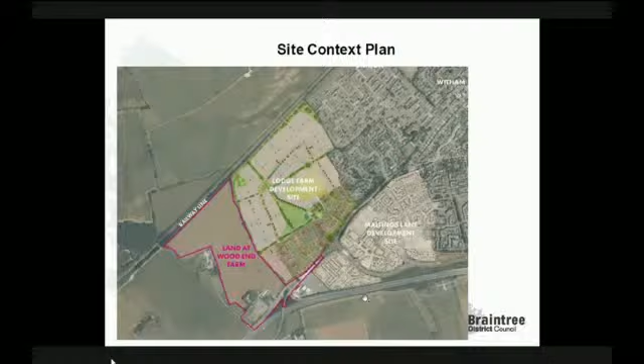In the wider context, further to the southwest lies open countryside in agricultural use that serves to separate Witham from the neighbouring village of Hatfield Peverel, which lies approximately 1 kilometre away from the site boundary. Witham Town Centre is located approximately 2 kilometres to the northeast of the site and provides a wide range of shops, services and facilities, as well as having a mainline railway station. Hatfield Peverel Station is located approximately 2 kilometres to the south on the same line as Witham.

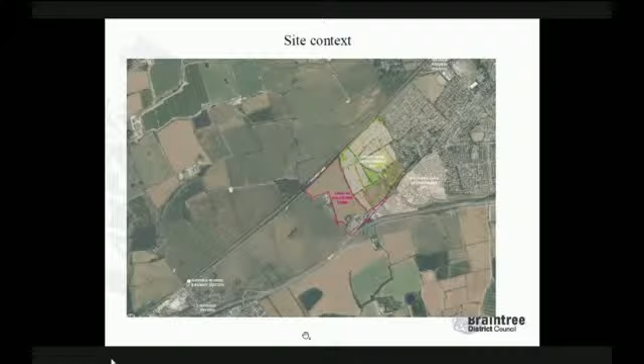The site comprises a single field with a peripheral field boundary marked predominantly by hedgerows and in place hedgerow trees. The southern section of the site is occupied by commercial premises, primarily a car dealership, which comprises a range of buildings, areas of hard standing and circulation space, accessed off Hatfield Road. Immediately adjoining the application site on its southwest boundary is Wood End Farm itself, and an additional residential property known as Mayfield Cottage. There is also the King Centre, a place of worship, and a converted office barn, both of which are currently accessed from a private drive that leads from Hatfield Road close to the junction with the A12.

In terms of the policy context, the site has been allocated as a strategic growth location under Draft Local Plan Policy LPP 23 of the Section 2 Plan, a factor which must be given significant weight in the planning balance assessment for this proposal.

The policy proposes up to 450 new homes, affordable housing, formal and informal open space, play space and allotments, including an appropriate countryside edge to the development and buffering to the railway line to the north. A new 30-place standalone early years and childcare facility, financial contributions to primary education provision, and contributions to other community facilities, including health.

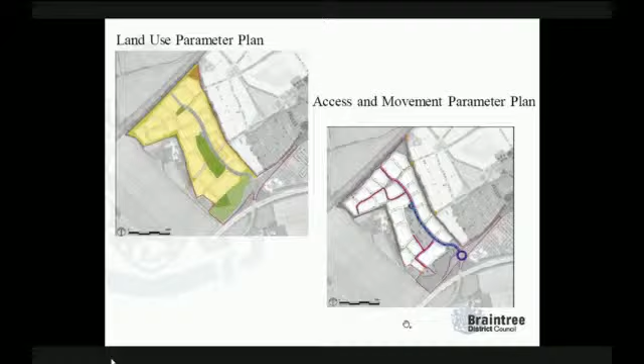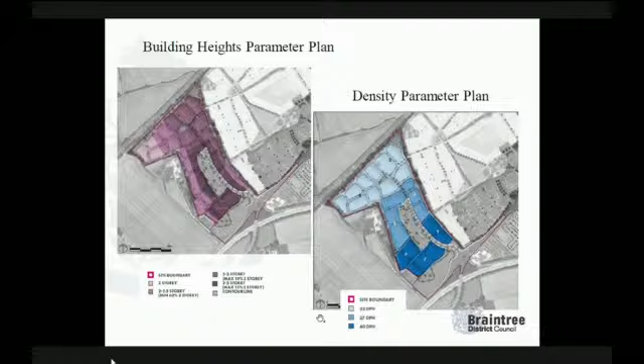The roundabout would create a new arm into the proposed development, with one lane in and one lane out, with a new pedestrian crossing point in the middle. A new arm to the A12 slip eastbound towards Ipswich would be created, with 2 lanes either way.

A new arm would be created westbound towards London to take traffic along, replacing the existing configuration. A new arm would be created to take traffic along Hatfield Road, providing 2 lanes Witham-bound with a dedicated right turn into the petrol garage. In the opposite direction, 1 lane would be provided before splitting into 2 lanes on the approach to the roundabout.

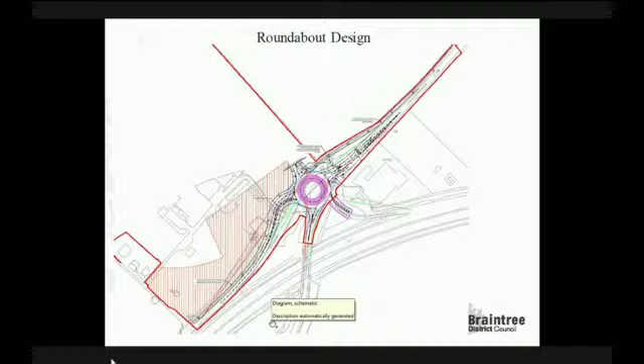In terms of the National Highways safeguarded land, National Highways have actually submitted a supplementary consultation that came out today with new plans, and they are currently designing a scheme to improve Junction 21 of the A12 as part of the government's road investment strategy.

Part of these proposals include the provision of a new Junction 21 between Hatfield Peverel and Witham. The new junction is proposed to fall to the south of the existing Wood End Farm development, where approximately 1 hectare of land has been safeguarded to accommodate these works.

These works include new pedestrian and cycle links, indicated in green, to Hatfield Peverel and to Witham, which will join up to the southern end of the Wood End Farm site.

Whilst the detailed design of the Junction 21 works have not yet been approved, the further consultation will lead to an application to be submitted. The estimation is in January 2022.

National Highways have confirmed that the new proposed roundabout and access arrangement into the site will not prejudice the junction works coming forward.

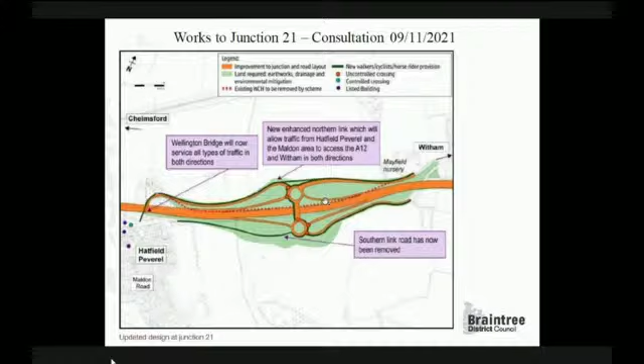As stated previously, the application includes a design code which officers have been working with Countryside on. The design code is considered to be of high quality and forms the basis of what future developers of parcels of land on the site must adhere to. It complies with the Essex Design Guide and Essex Parking Standards.

The site has 3 different character areas: the gateway to the south of the site, the greens to the centre of the site, and the lanes to the north of the site.

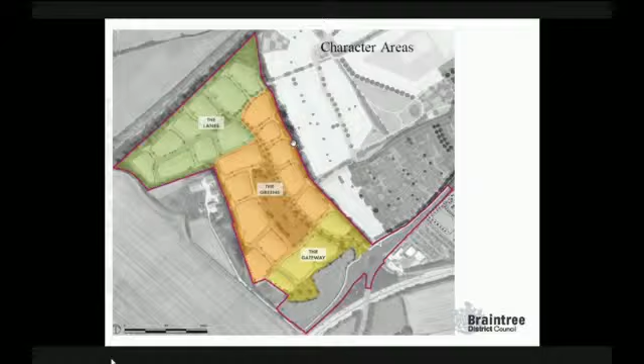The gateway provides the formal entrance into the site and also contains the highest built density within the development. It is important that it provides a striking gateway into the site and that it sets up the overarching character for the rest of the scheme, both in terms of landscape and built form.

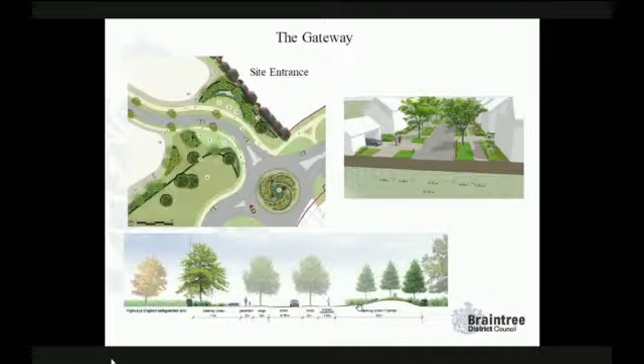This character area will include a greater variety of materials to add character to the slightly higher density development. Some uniform use of materials is appropriate in the central parts of the individual street scene to ensure logical use of materials and reflect streets and building status.

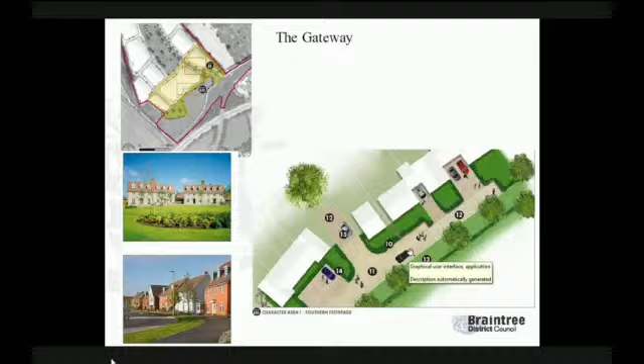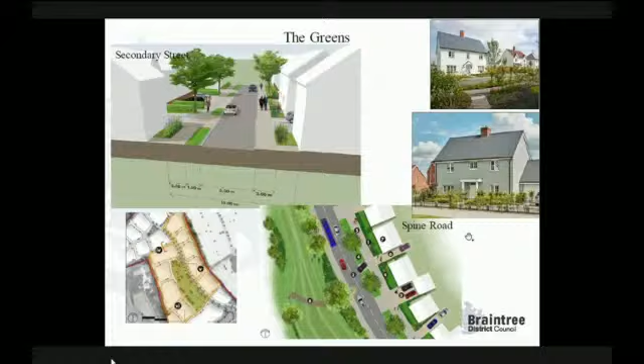The greens occupies the central portion of the site and provides frontage onto the main open space and Spine Road. It is mainly of medium build density and also includes the interface between Lodge Farm development to the east and the existing Wood End Farm complex to the west. A light green weatherboarding is introduced for predominant use in this character area, reflecting the large area of open space, as well as beige buff bricks and some limited use of yellow and green render.

This character area also occupies the central park space. The park space comprises predominantly grassland and a play area, overlooked by dwellings on all sides. This open space will be informal and open in design for flexibility for a range of uses, but framed by a line of trees to define its eastern edge in relationship with the Spine Road. The central park will include active space for kickabouts, a local play space area, informal play with stepping stones.

The central open space is segregated into active, passive and flexible space, as seen in the top right hand corner of the screen. The park's design has been incorporated to take all age groups into consideration by providing informal shady areas to sit and have picnics, active areas for football and a formal play area.

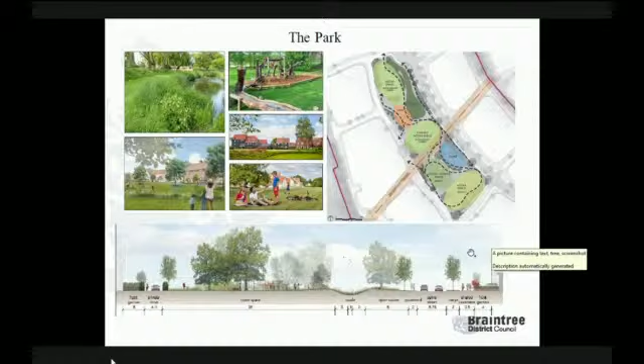The park also accommodates a series of infiltration basins and a swale contributing to the drainage network. These gentle depressions in the ground will be dry for the majority of the time and can be used for recreation, only becoming wet in high rainfall events.

There have been lengthy discussions with ECC SUDS, the developer and officers with regards to the SUDS on the site in terms of usability, design and specifications. The drainage strategy is made up of a combination of underground crates in the middle there, a swale that runs

from north to south, a forebay, which is this pond area here, and 2 infiltration basins, located within the southern area of the park. This combination has been devised in order to maximise the efficiency and effectiveness of the SUDS options, whilst also maximising the usable open space within the park.

The ground investigations identified the southern end of the park as the optimum area for infiltration, and the master plan has been shaped around providing infiltration in this area.

For the majority of the time, the infiltration basins will be dry and can be used for recreation. However, at times of heavy rainfall, Basin 1 will fill with water, with Basin 2 immediately next to it providing an overflow area for extremely high rainfall events, maybe a 1 in 30 storm event, so that Basin 2 will remain dry predominantly all the time.

A raised weir, should Basin 1 be full, is provided, where you can see number 3 on the screen. A pre-treatment forebay is included for pollution treatment, which has a pond dipping platform.

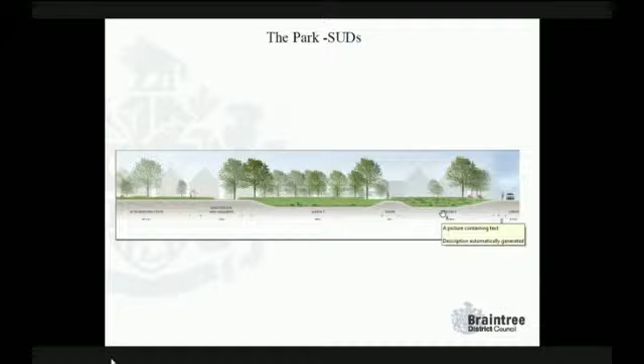In terms of the final character area to the north, the lanes, this part of the site forms the rural interface between the development and the open countryside to the northwest. It comprises the lowest built density and is looser in character, containing a smaller village green, grass verges and the site's allotments, as well as the northern green corridor. Pale blue and off-white render is incorporated for use in this character area, combined with greater proliferation of darker weatherboarding, which will reflect the rural character of this type of development.

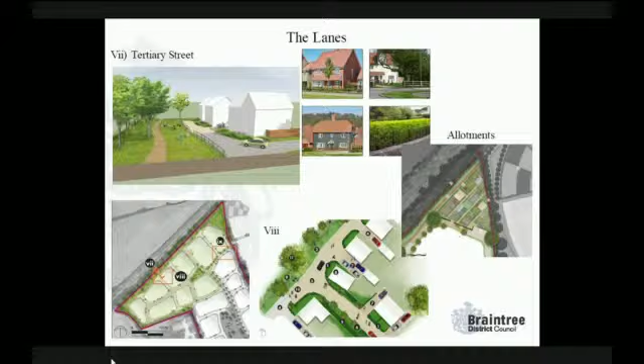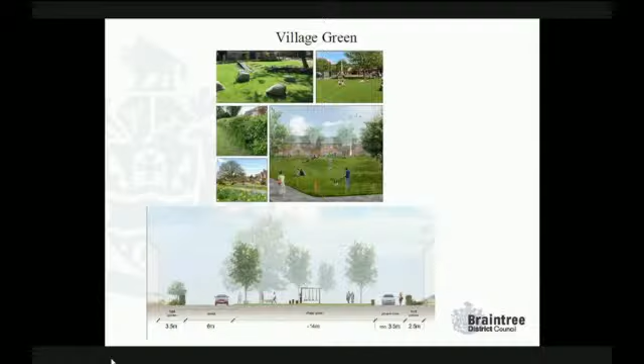A smaller village green is located in the northern area here, which provides opportunity for informal play and a lap for children. Like the main park, its boundaries are generally open, with tree planting providing shade. It's overlooked on all sides by dwellings and accessed by pedestrian footpath links connecting with the wider network of open space and green corridors.

The site incorporates wide green buffers around the periphery made up of existing and proposed vegetation. An 8 to 10 metre buffer will be provided on the western and eastern boundaries, containing buffer planting and informal footpath. Existing boundary hedgerows will be supplemented with native shrub planting, as well as a grass planting strip to separate the boundary planting from the streets and built form of the development.

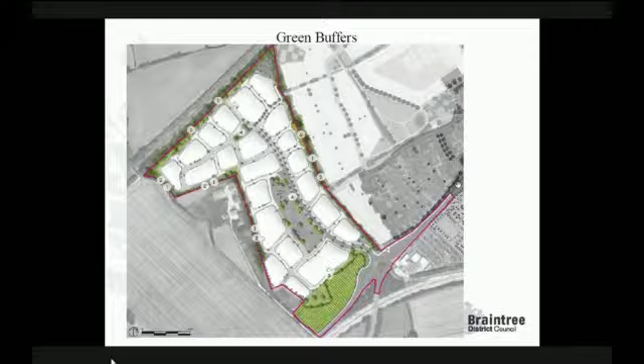The northern boundary buffer, adjacent to the railway line, is consistent with that approved at Lodge Farm adjacent. Within this space, areas of open space are provided, which includes a meandering foot and cycle path linking to Lodge Farm, potentially at its eastern end, and varying widths of amenity green space, consisting of a combination of grassland, planting and trees. The width of this buffer will range from 10 metres towards the eastern end to 23 metres in width from existing vegetation to building edge.

Although very little wildlife interest was recorded on the site requiring mitigation, biodiversity enhancement principles were designed into the scheme at the earliest stages, aiming for a net gain in biodiversity across the site. Replacing areas of commercial land and intensely managed arable farmland, this scheme has incorporated green buffer strips around the site to aid and encourage wildlife movement, supplemented by green corridors through the site in the form of verges and treed boulevards. These provide broad strips of landscaping and buffer planting and allow for quiet enjoyment. The northern boundary, in particular, has been broadened to assist use of this land by animals such as reptiles, which were found to move between the railway line and the small strip of grassland that existed in the area.

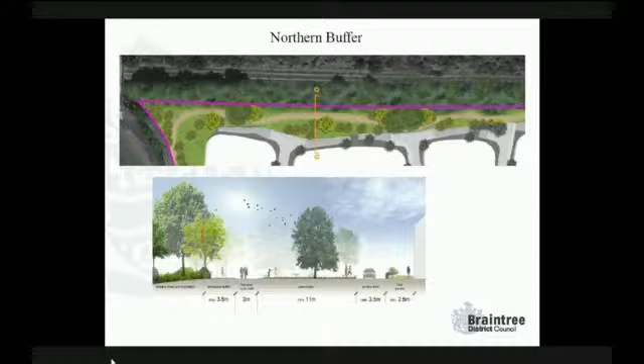In terms of the National Highways safeguarded land, it's important that there's an interim design which provides a positive interface between the residential parcel and the safeguarded land, and which ties in with the design intent of the scheme as a whole. The detailed design of this layout will be pursuant to requirements of the Section 106 agreement, but it is envisaged that hedgerow and grassland paddock is proposed, with the southern edge and boundary with the A12 slip road defined by a simple timber post and fence rail.

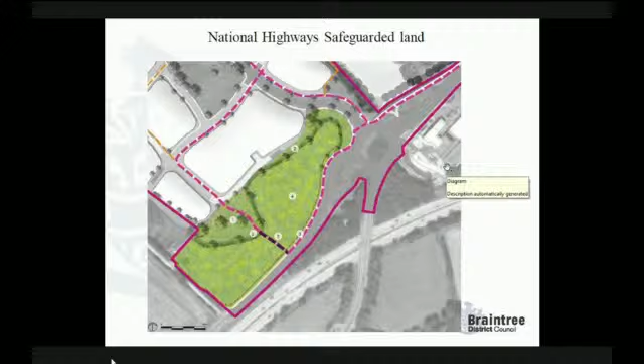Whilst all effort has been taken to protect existing trees on the site, due to their random nature, it's not possible to retain them on this occasion. Importantly, a large number of the existing trees and groups of trees on the site are being retained, particularly around its boundaries, where well-established mature tree cover exists, particularly to the north, east and western boundaries. In terms of tree planting, the scheme includes significant proposals and a commitment to net gains being made.

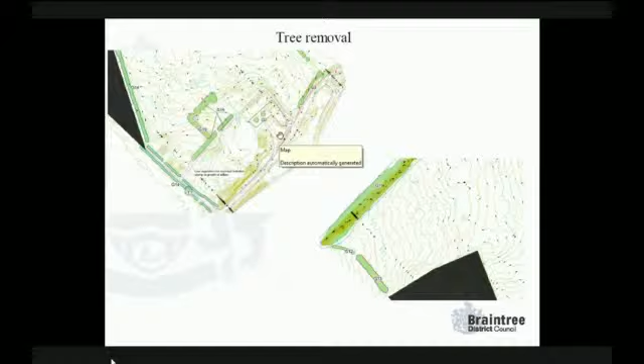These areas here are identified within the commercial area, and some of them are already located within the highway safeguarded land. In terms of accessibility, the site itself is located adjacent to the town boundary, which lies to the south-east of the site on the southern side of the existing road infrastructure. The average walking times to existing facilities are shown on the slide. This is an average adult walking time. To the western edge of the site, within the existing Wood End Farm complex, but outside the application red line, sits a variety of uses.

This includes a place of worship, the King's Centre, as well as the Sunday church services. The King's Centre offers a variety of uses and clubs during the week, which includes parent and toddler group, karate and charity sessions. Two pedestrian links are being proposed from the site into the existing Wood End Farm complex, which will allow residents pedestrian access to use these facilities.

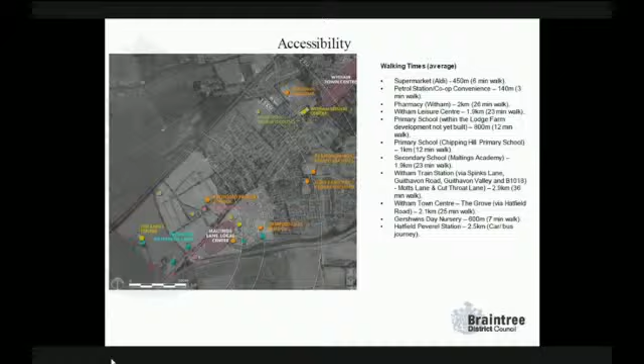The application proposes to divert an existing service into the site, providing access to Witham Town Centre and the railway station. Discussions have been undertaken with First and Essex Highways, who have confirmed the acceptability of such a diversion, which would entail extending the existing bus route, which runs from Broomfield Hospital to Boreham via Chelmsford, from Boreham to the development via Hatfield Peverell and Witham. This would provide a 30-minute frequency service from the development to a variety of destinations, including the station. The service would be timetabled to meet certain train times from London Liverpool Street.

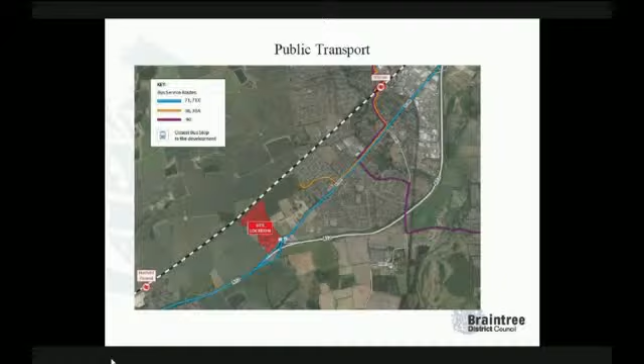The service would access the development from the proposed roundabout, as shown on the movement parameter plan. To encourage the use of the bus service, it's proposed to provide all residents with up to 12 months free bus travel when the bus service is implemented. The provision of the bus service has been secured within the Section 106 agreement.

There are numerous on-road and off-road cycle routes around Witham, including National Route 16, which is made up of two sections running from Stansted to Shoeburyness.

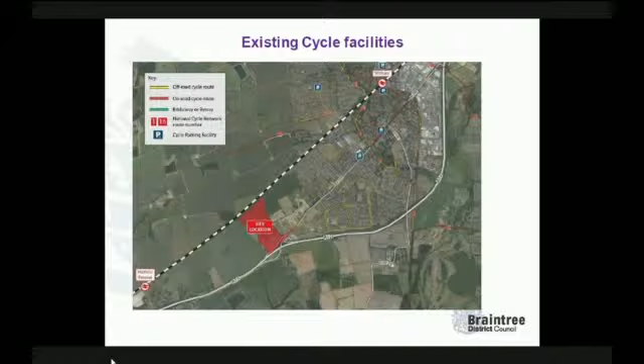As part of the adjacent Lodge Farm development, a detailed cycle improvement strategy was agreed with the applicant to implement connections to the town centre, railway station and other key points around Witham. These works are yet to start, but specifications are currently being agreed with the Highways Authority.

The development would provide a cycleway at the site access which would connect along Hatfield Road to the improvements being delivered within the adjacent development at Lodge Farm and Maltings Lane, and further west to the existing Wood End Farm entrance. This would also tie into National Highways works on the A12 by continuing this route along the A12 to Hatfield Peverell. A new crossing has also been proposed on Hatfield Road to link the development with the adjacent petrol garage to the south.

These improvements have all been secured by way of condition and Section 106 heads of terms. Works have also been secured through the Section 106 to improve connectivity between the site and the centre of Witham, including improvements to the Riverwalk.

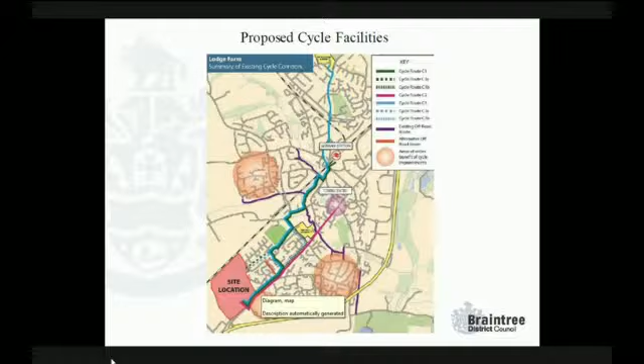These include the installation of a 4-metre wide toucan crossing to replace the existing zebra crossing along Spinks Lane outside Maltings Academy, the removal of the grass verge outside Maltings Academy to provide a full width shared surface, along with the widening of the corner of Spinks Lane and Hatfield Road.

Improvement works include the provision of a 2-metre wide pedestrian refuge island along with footway widening works. A Section 106 contribution has also been sought from the developer to deliver improvements to the Riverwalk and existing footway.

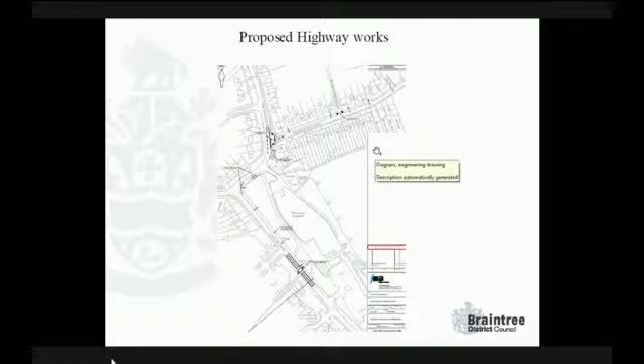In terms of energy efficiency, this currently comes through building control regulations. However, a condition has been recommended in relation to electric vehicle charging points for each residential property, and Countryside have committed to that within the design code.

Having said that, and going further, the question has been posed to Countryside given the climate agenda, and they have provided a list of commitments as a company. Furthermore, Countryside have confirmed they are striving towards this site being electric only, with no gas or fossil fuels to be provided to individual homes.

The financial figure, should the bus provision not be procured - Essex Highways have updated their response to ask for a financial figure of 1.25 million to be able to provide for sustainable transport. In terms of the Section 106 healthcare provision, the committee report stated that the trigger point had not yet been agreed. This has now been agreed for a payment to be made prior to commencement of development.

In terms of the Section 106 River Walkway improvements contribution, a figure of £25,000 has been agreed to be paid towards Witham Town Council's Cycleway and Footway renewal programme. In terms of the NHS ambulance contribution that was sought, on consideration, officers consider that this contribution request does not accord with CIL requirements, and therefore no contribution has been sought to this effect.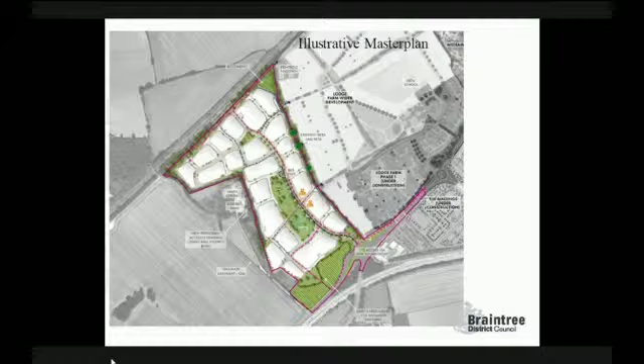So you can see the connection points potentially being sought through the illustrative layout — that's not for approval, but you can see from the master plan the linkages into, or how they could be taken through to, the Lodge Farm development. That is, in officers' view, the best that we're able to achieve. We can't compel the applicant to form those connections where it's beyond their land ownership and control — that's a separate commercial point. If the site was landlocked and those connections were clear, that's where we could have had something firmer within the emerging policy to require those connections. But hopefully that provides some clarity.

And then I take the point about the NHS contributions and the position in terms of Witham. As I said, from an officer perspective, we've sought to secure the contribution requested by the NHS and secured the trigger as early as possible to ensure those funds could come forward. In terms of the other points, sorry, I'm just looking through the statement from Witham Town Council again.

So the fire hydrant point is actually picked up within the report under the fire services response. If you bear with me, I'll just find the page number for you. So it goes over between page 18 and 19. But effectively they've looked at that. So there is a point about fire hydrants, but effectively that's picked up and would be a matter for future consideration.

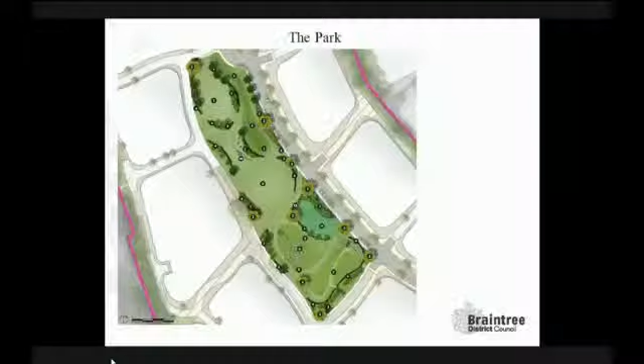Alison, have you got the plan again for the SUDS feature? Perhaps we could just put it back up again. I might have to pass over to Alison for a bit more of a detailed explanation in terms of the site itself, in terms of the southern and northern part of the site being suitable, and the areas of open space. But effectively with what's proposed, certainly from my professional view, the area that's being proposed here is actually a really high quality area of open space.

It's well established, and certainly from an officer perspective and from County SUDS as the lead local flood authority, SUDS does have an opportunity to actually enhance areas of open space in terms of quality and richness, as well as the biodiversity and ecology around it. But perhaps, Alison, could I just ask you to come in on the specifics there about the usability of the area and the quantum of open space?

Yeah, sure. So for this site, the original proposal was that there were going to be different SUDS basins located around the site. However, having undertaken more discussions with the applicant, the SUDS basins were actually reduced to where you've got an underground crate, that was another SUDS. Now, we worked very hard with the applicant in terms of the gradients of these basins, the usability, where the SUDS could be located, and how they could be incorporated into the development, as opposed to either a large basin at the front of the site, or scattered around the site, or large ditches, similar to Lodge Farm, towards the edge of the site. Working very hard with the Lead Local Flood Authority and the developer, this was the best solution given the soils for this particular site.

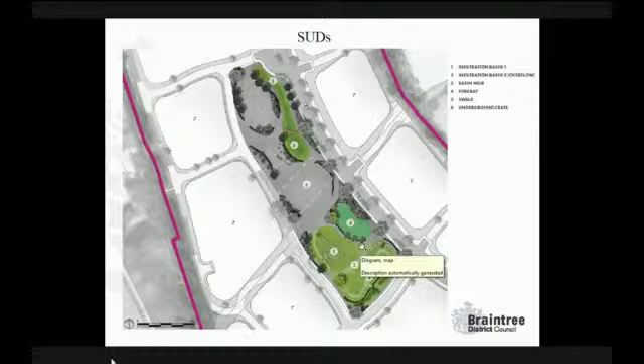Thank you very much for that explanation. For Witham Town Council, I just want to note the fire hydrant question you asked is answered on page 19. And with regards to heat pumps and solar panels, we don't have a policy whereby we can ask for those at the present time, which does rather upset us at times, but I just want to make that clear for you.

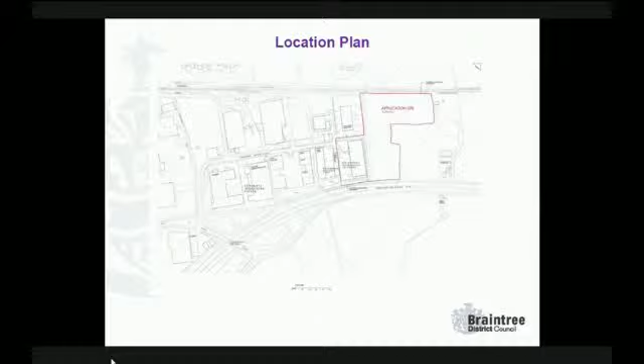Moving on to the existing site plan, which shows the topography of the site. You have the existing industrial estate, located on the left-hand side of that plan. One of the existing features, which I'll come back to, is the existing tree belt which screens that side of the industrial area from the open areas to the north, east and south.

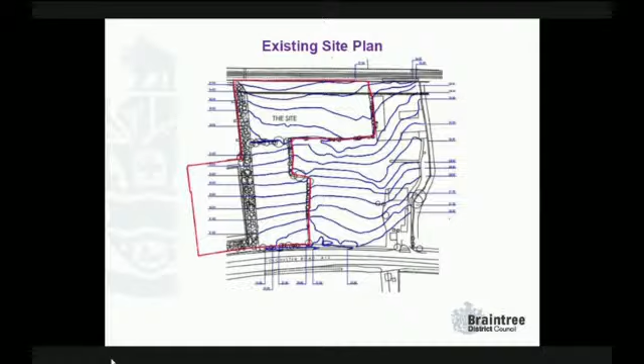And then a little bit more of a wider context in terms of the site plan, so again you can see the arrangement of the site. Now, members may recall the land on the right-hand side of the red line plan - this was subject to a separate application which came before members at the end of September, where there was a resolution to grant permission for a similar form and scale of development as proposed within this application site area.

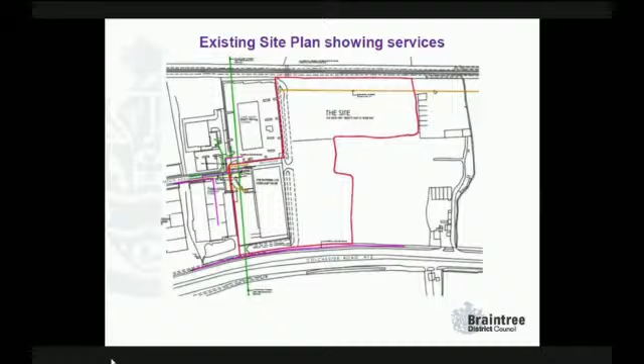The site is also located within flood zone 1, which is a low probability of flooding. And critically, the site, along with the land adjacent on the right-hand side, forms part of an emerging draft allocation within the Section 2 plan as an employment policy area.

So in terms of the proposed development, the application is in outline form with all matters reserved apart from access and scale. As mentioned, the use classes proposed are B2, B8 and E(g)(iii), which is the new use class for light industrial. There's a maximum ridge height proposed across the site of 43 metres AOD and a maximum floor space of 15,470 square metres. That's the parameters that effectively we are looking at.

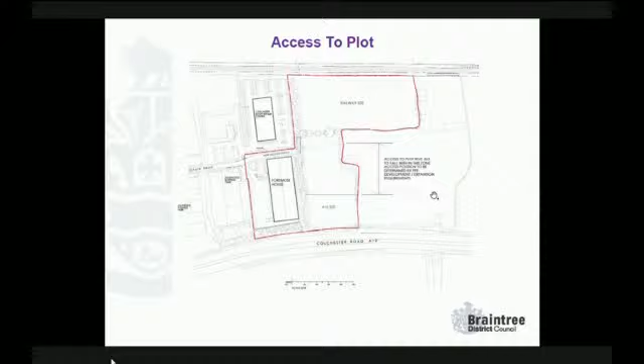As mentioned, in terms of access, it would be via the existing access off of the Eastways site. This plan shows in a little more detail the two existing buildings adjacent to the strategic allocation, and you'll see indicated here the area within which access would be provided to the adjacent land that now benefits from a resolution to grant outline planning permission.

One parameter plan for approval, as set out within the report, shows the maximum heights across the site for buildings. It steps down as you get closer towards the A12, which aligns with the adjacent site, giving us certainty that the scale of built development on the site, as it would come forward as reserved matters, would be appropriate within the local context.

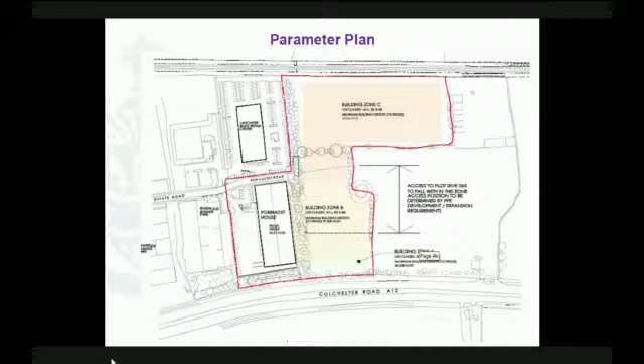In terms of tree constraints, as mentioned at the start of the presentation and shown on the plan, we have this existing tree belt, which effectively forms the boundary at present to the existing industrial site. As part of these proposals, that tree belt would largely be removed, and the justification is that without the removal of that area it would severely prejudice the delivery and development of the draft allocated site. Towards the southern end, for instance, the option previously shown of extending the existing building would not be able to be pursued without removal of that tree belt area.

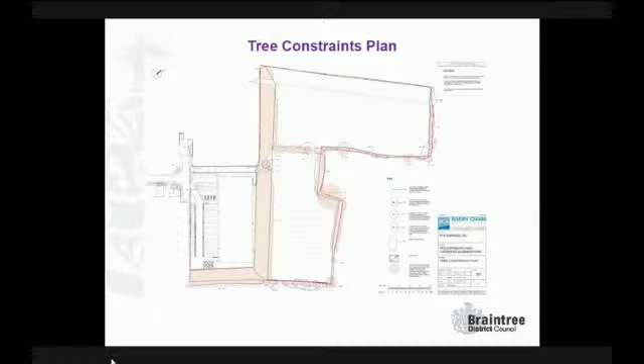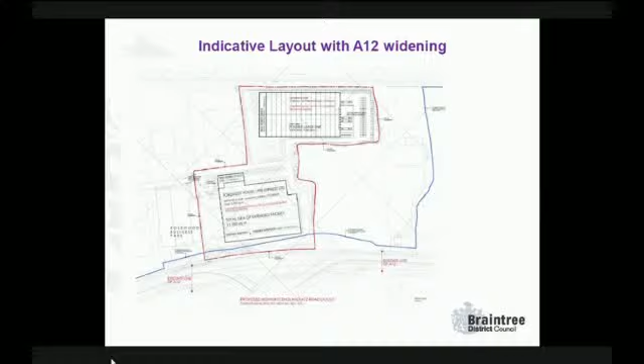As mentioned in the report, and as members will be aware from the adjacent application and the wider project, we have the proposals for the A12 widening. This plan shows, in the blue line area, some of the land that would potentially be impacted by the A12 widening and that would need to be safeguarded. But it also shows how development of the site could come forward outside the scope of that area and still provide suitable access and parking arrangements.

And again, a further indicative layout with a temporary car park option, in the event that the existing building was proposed to be extended on that southern parcel.

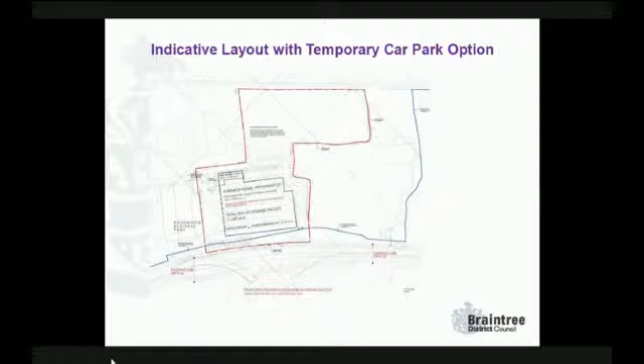Returning to the tree issue, this indicative landscaping plan seeks to demonstrate that the loss of the existing tree belt could be mitigated through boundary landscaping along the perimeters of the site. The adjacent area of land also performs an important role in terms of wider views and screening, given the boundaries and openness of the site beyond. This application, in the areas indicated, would be able to contribute towards those same objectives.

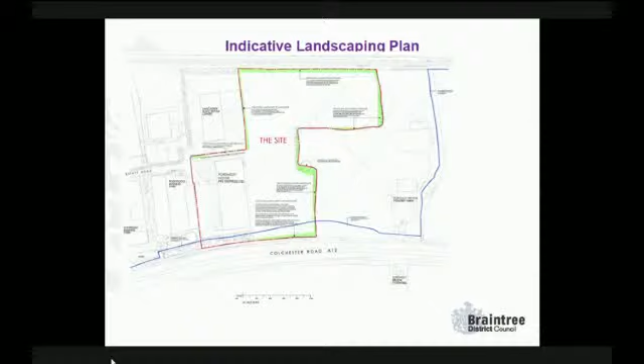In terms of key issues, there is a technical conflict with the development plan in that the site is not allocated for development within the adopted development plan. As mentioned, the site does benefit from a draft allocation within the emergent Section 2 plan, but there is that area of conflict with the adopted development plan. The main adverse impact officers would identify is tree loss in terms of the tree belt, and officers acknowledge the harm arising from this.

However, there is really no way, within the proposals or the allocation, for this tree belt to be retained, as it would significantly reduce the ability of the site to bring forward the scale and range of employment floor space envisaged from the strategic allocation. It would severely prejudice many of those indicative options put forward by the applicant and agent. Critically, from an officer perspective, although there is an adverse impact, we feel that would be outweighed by the economic and social benefits arising from the proposal.

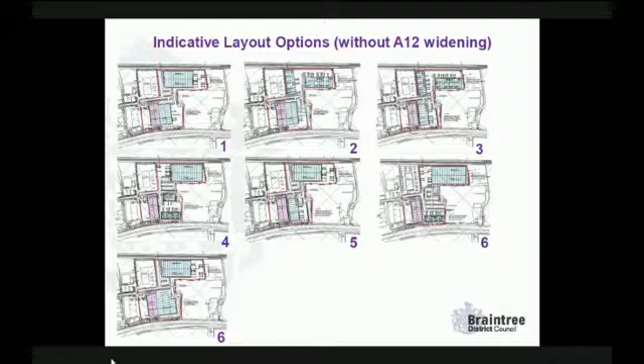Those 7 options on the screen show the various permutations of that, and you will see from different options the extent of potential loss is greater on some and less on others. That would be part of the assessment of the reserved matters applications for layout, which, given the scale of development, would come back to planning committee for consideration at that stage.

Well, I still struggle because we've got lots of other conditions which are in principle, but I'll take that view and then I'll go with what I've proposed for the other two changes.

Right, so you're moving it with the condition regarding the cycle link and the informative regarding the solar panels. Does that find a seconder? Oh, it does, Councillor Horner. Did you wish to speak, Councillor? No. Right, does anyone else wish to?

Councillor Mrs Spray: Thank you, Chairman. Just briefly, I appreciate that this has been a bit frustrating for the applicant, the delay with this, which I think was at least in part down to some operational reasons. I know they did contact the leader expressing some frustration about it, but I'm grateful to them for their patience, that they've hung on for it to get to committee this evening, and I'm pleased that it's been recommended for approval.

It is an allocated site for employment, so it's going to be good for jobs in the district. It's nice to see that, although this is an outline application, quite a bit of thought has already gone into possible layouts. My only other point was around trees and tree removal, which I was assuming would come forward with the reserved matters application. I couldn't see anything else in here about it, but I am assuming that will form part of that. Other than that, I think it's a very, very welcome application.

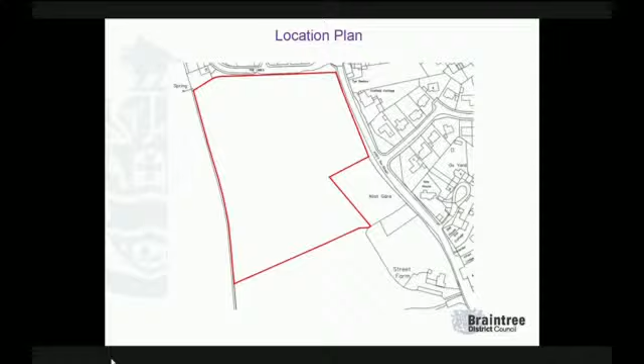So this is the Limes site in Gosfield. Just a couple of plans to show you the issues. This is the development that you would have seen when Melanie presented it earlier in the year. You'll see, although perhaps not very clearly on this screen, it's annotated to show public open space in this northern section where you've got the trees, which give the site its name, but also these areas down here - public open space and public open space down here.

I think anybody, including planning officers and members of the public at the time, would have looked at that plan and very reasonably had an expectation that all of those areas would be provided as public open space, available to all, with no restrictions on their use as such.

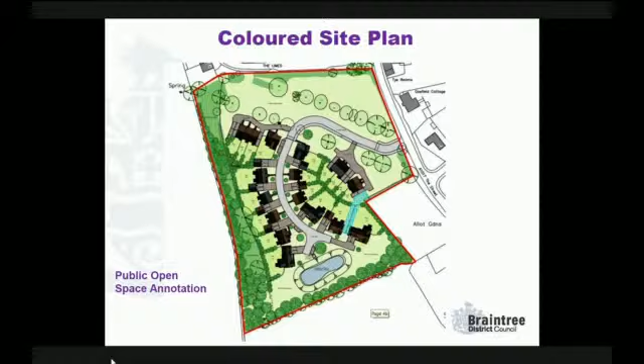Following on from that, there was an additional plan just in case there was any doubt, which quite clearly shows the blue as being the public open space and the yellow, or creamy colour on the left, being ecology land. So you can see quite clearly what was proposed. I would imagine, without knowing what members were thinking precisely, that generous provision of public open space on site would have been one of the significant benefits members would have taken into account when they made the decision to support the application.

The disagreement is really just around this southern parcel, down the bottom of the screen where you've got the SUDS basin. When officers raised this with the planning agent, Strutt & Parker, we were somewhat surprised at some of the reasons given why it couldn't be provided as public open space. This included the fact that it had a SUDS basin within it and a pumping station. We did point out that there were numerous applications where Strutt & Parker had been planning agent at other sites and had quite happily put forward public open space provision with SUDS and pumping stations within it. We certainly didn't see why this site would be any different and why that shouldn't be publicly accessible.

We were also told that there is an issue with regards to public access to it because the developer doesn't intend to provide public highway through to the site, and the private roads wouldn't allow pedestrian access or public access. I think we've certainly made the point that it's the developer's choice as to what access arrangements are put in, and there's no reason why public access shouldn't be provided to that area at the bottom of the site.

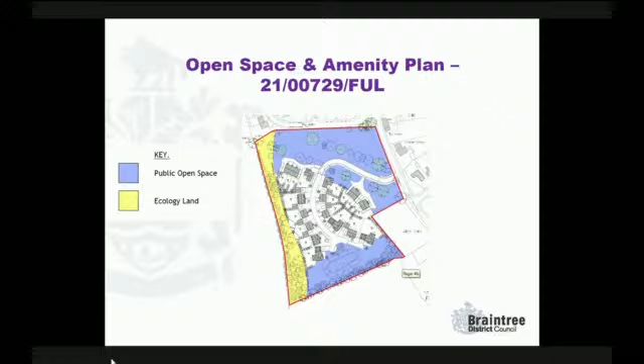I've included this as well just to emphasise the point. This site had an older permission for a slightly lower number of dwellings, 17 originally, but there was a Section 106 agreement which secured that land at the bottom of the site as public open space. This was another point that officers raised with the planning agent, and we were somewhat surprised to hear that there was never actually the intention to provide that as public open space - I am paraphrasing slightly here - but it was done for commercial expediency.

So really what in effect we were being told was they agreed to it being public open space, not because it was going to be provided as such, but because they thought that was the quickest way to get a planning permission and to avoid problems getting the permission, which I think is a very disappointing position to take, and one that doesn't really reflect very well on the developer. I think it wouldn't have reflected well on the council if at some point in the future we'd come under pressure to change the status of that land and it wasn't public open space.

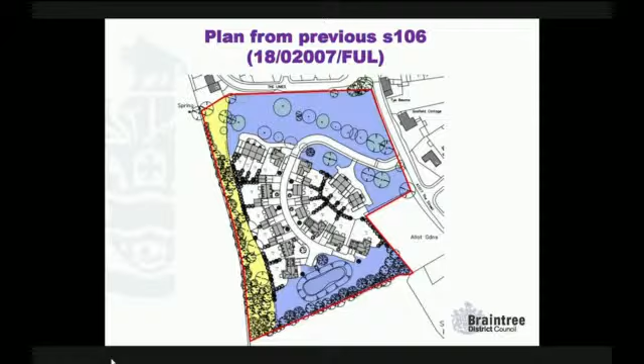So just by way of very brief summary, like I say, it has all the characteristics and appearance of public open space. It's been designed as such - that's certainly how the officers dealt with it when it was being designed. As we've set out within the report, the NPPF does talk about social aims of planning, talks about things like inclusive community, providing opportunities for social interaction, providing activity within public open space to prevent fear of crime. So we think there's strong cues within the NPPF that would lead us to think this should be provided as public open space.

Whilst the agent has clarified that the management arrangements will be no different, so it would be maintained by a management company funded by the residents, this difference in access arrangements is something that we don't consider to be appropriate.

As I said, we can see situations arising either where there's friction between residents of the village or pressure to put up some form of enclosure or signs just telling people not to do things, which I think we've all seen in various developments and never look particularly inviting or good. So we really don't see why we want to have that situation arising.

I think there's also an issue that actually it diminishes the benefits that the planning committee would have taken into account when they passed the resolution to grant permission. And the government is quite clear that developers should not be coming back subsequently after permission is granted and diluting the quality of what it is that they've proposed originally.

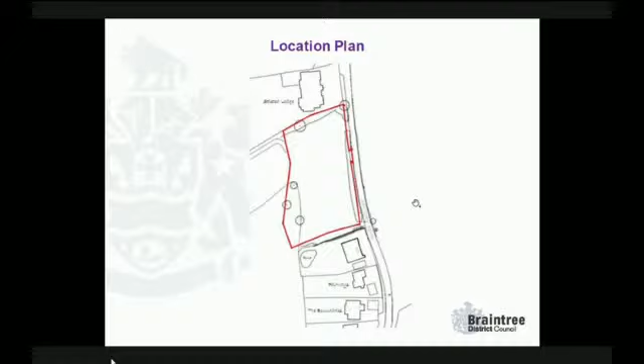The proposed block plan shows that the 3 dwellings do fit comfortably within the site and there is a good level of private amenity space for each dwelling. There is a new access proposed off Rectory Road and each dwelling would have parking for at least 3 cars plus each would have a double garage.

The public right-of-way would be separate from the site and would retain its access from Rectory Road through to the golf course, and the boundary treatments proposed for the site are metal estate railings to the front, post and rail to the rear, and willow fencing to the side and between the plots.

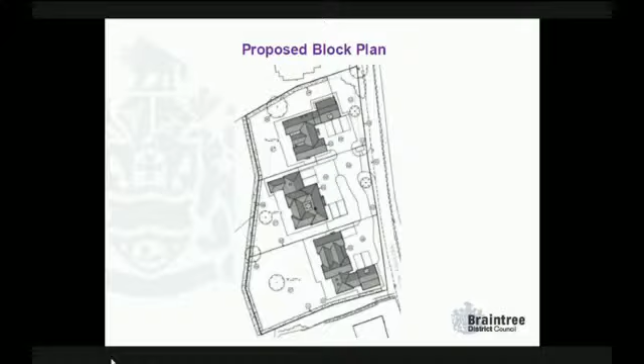Moving on to the elevations of plot 1, this plot is to the south of the site and is characterised by two gable ends with attached garaging extending forward of the front elevation of the dwelling. The ground floor plan is substantial, has substantial internal accommodation and has open plan kitchen, living, dining area and further reception rooms. It's considered that there is a good level of natural light and outlook to all habitable rooms.

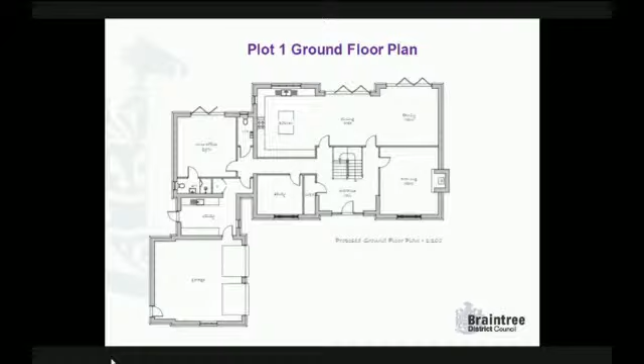This is echoed in the first floor plan, where there are 5 bedrooms with 3 en-suites and a family bathroom, and it's considered that there's a good level of light and outlook as well.

Plot 2 is the middle plot in the scheme. This differs slightly in design. It's more compact with the garage located to the side. It has a flat front elevation with a hipped roof, and to the rear elevation there'll be 2 protruding hips and a small single-storey element extending from the garage.

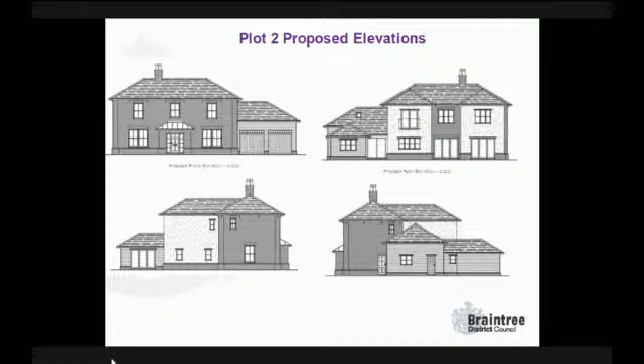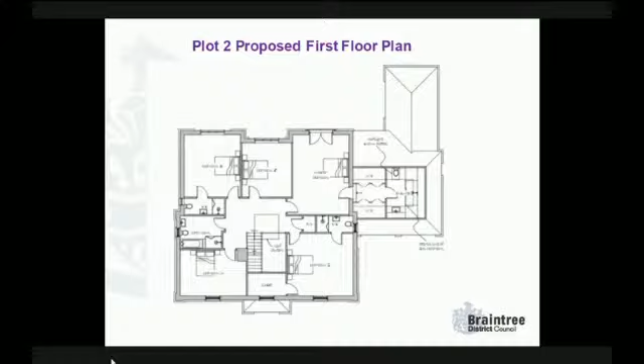Again, there is an open plan design for the main kitchen, living, dining area with further reception rooms and good levels of light and outlook to all. The first floor plan is similar to that of plot 1 with 5 bedrooms, 4 bathrooms and a good level of light and outlook.

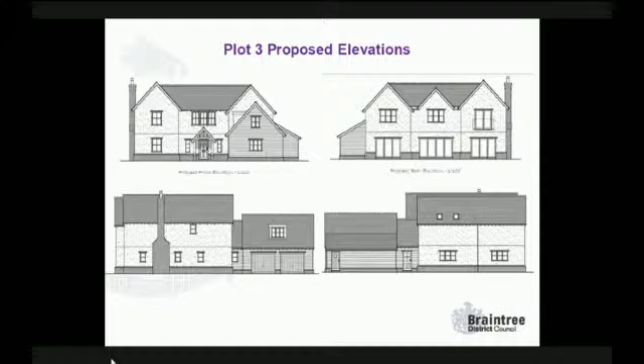The proposed elevations of plot 3, which is to the north, mimics that of plot 1 in terms of design, but the garage will be partially obscuring the front elevation of the dwelling. As is with the other dwellings, a similar level of accommodation is afforded to plot 3, with good levels of light and outlook to the ground floor and the first floor to all 5 bedrooms.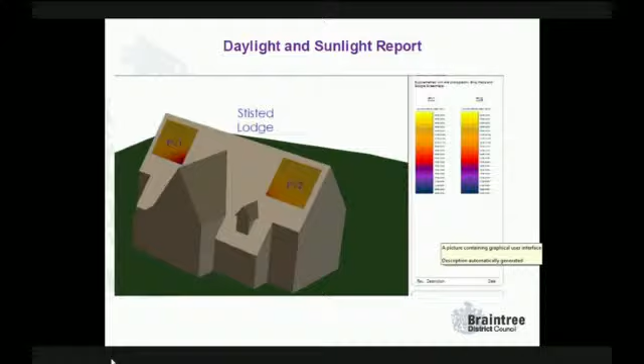This image shows the solar panels with plot 3 in situ. It shows that the solar gains are identical and that there is no material impact on the solar panels as a result of the proposed dwelling, plot 3.

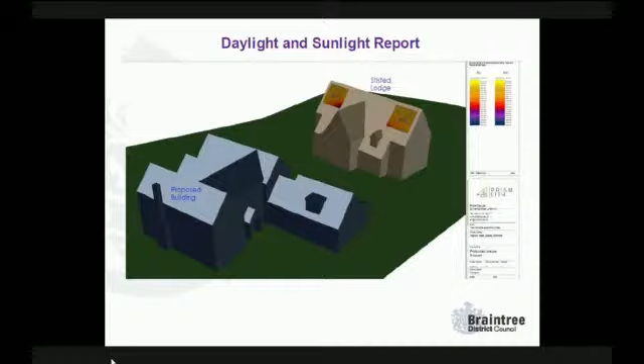In summary, whilst the proposal conflicts with the development plan due to being located outside of the development boundary, the principle of development is established under the 2018 application as it was allowed at appeal.

It is considered that there will be a good level of internal and external amenity for all dwellings, and officers are satisfied that the proposed dwellings would have an acceptable relationship with both neighbours. The scheme would also deliver 3 new dwellings to add to housing figures, and there will be a limited economic and social benefit during construction and in supporting local facilities once occupied.

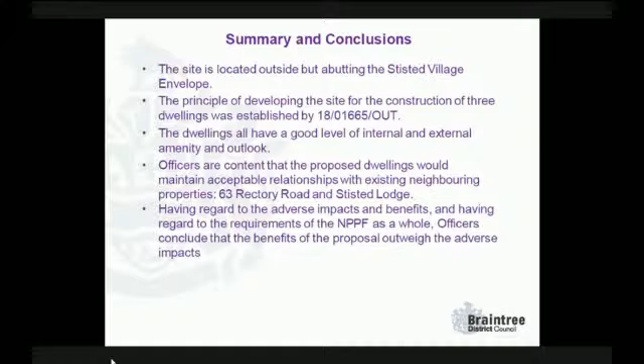Councillor Mrs Spray. Thank you, Chairman. Thank you, Ellen, for a very, very clear presentation.

As an authority, we refused this on several, we thought, very clear grounds: that it would represent ribbon development in the countryside, be harmful to the rural character of the area, and would be heavily reliant on car use. It went to appeal and was allowed, which is obviously disappointing for us, but the inspector disagreed and said it would result in little harm to the character and appearance of the area. She also dismissed the reason of being reliant on car travel, not thinking that was a particularly good reason for refusing it, so it was allowed.

The only comment she made in her decision in relation to Stisted Lodge was, in point 16 of her conclusion: 'I'm satisfied that the site is of sufficient size to ensure that 3 dwellings could be accommodated without undue impact on the living conditions of the occupiers of Stisted Lodge, or indeed the residential properties to the south.'

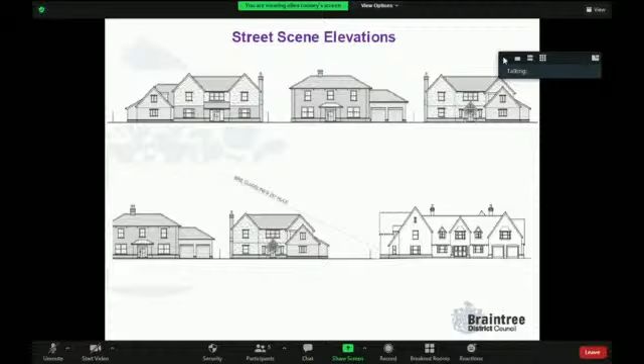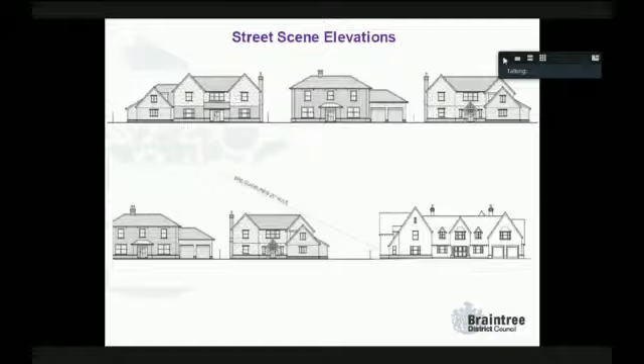Okay, thank you. Does anyone else wish to add anything new or further? No. Well, it has been moved by Councillor Mrs. Spray and seconded by Councillor Ritchie that we grant this application. All those in favour of granting the application? 1, 2, 3, 4, 5, 6, 7. Those against? 1 against. Abstentions? 3 abstentions. So that's fine. That application has been granted.